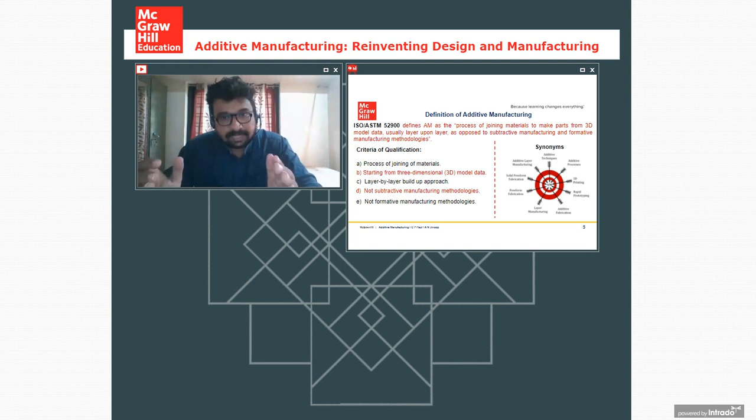If you come to the synonyms, there are different ways in which additive manufacturing has been known in the world, like 3D printing, rapid prototyping, additive fabrication, layer manufacturing. There are different ways in which people call additive manufacturing. And now ASTM and ISO standardized additive manufacturing as a single terminology for calling these processes.

And if we consider additive manufacturing, it is a natural process. And if you can consider it as a natural process, then it can be compared with plant growth. You can see how a plant grows from a seed to a plant, because it adds material and becomes a plant.

Similarly, if an infant becomes a man, it's also an additive process. And if you see construction work, it also happens in a layer by layer fashion, in which the bricks are arranged layer by layer to make a building.

So additive manufacturing existed for a long time, and recently it was taken to manufacturing because we got the technology. Initially we didn't have the technology to tame it, and we didn't have the technology to bring it to the manufacturing sector for industrial production. But now we have the technology to bring it to industries, and now we are using it for manufacturing of engineering components.

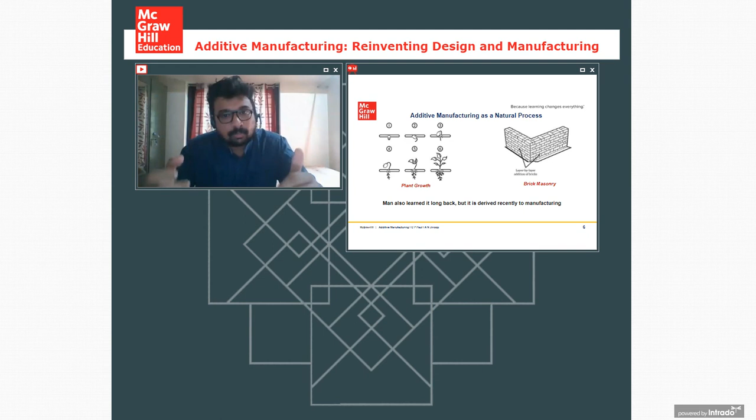So when we compare additive manufacturing with other manufacturing processes that are formative and subtractive, in terms of methodology, additive manufacturing means we are adding the material, while in subtractive we are removing the material, or in formative we are shaping the material. Coming to the lead time, it is less in additive and high in subtractive and formative. Coming to surface finish and dimensional accuracy, additive manufacturing is low to medium, subtractive is medium to high and formative is medium.

For material, additive manufacturing ideally doesn't have a material limitation. We should develop the process, we should develop the technology for processing any materials. But in subtractive and formative, we have material limitation. Subtractive is mainly limited by the hardness of the material, and formative is limited to metals and plastics. Size of the components in additive is mainly limited to the machine sizes, while in subtractive we can make large components. In formative also we can do it.

Complex geometry is a major advantage of additive manufacturing. We can make complex components of very high complexity as compared to other manufacturing techniques.

And coming to the last point, green technology: in additive manufacturing, since we add the material in a layer by layer fashion, there is no wastage of material. We can say that almost 60 to 90% of the material is used; you have a good amount of material usage, and minimal material wastage in additive manufacturing as compared to other processes where we are removing the material. So these are the ways in which additive manufacturing can be compared with other conventional processes for manufacturing parts.

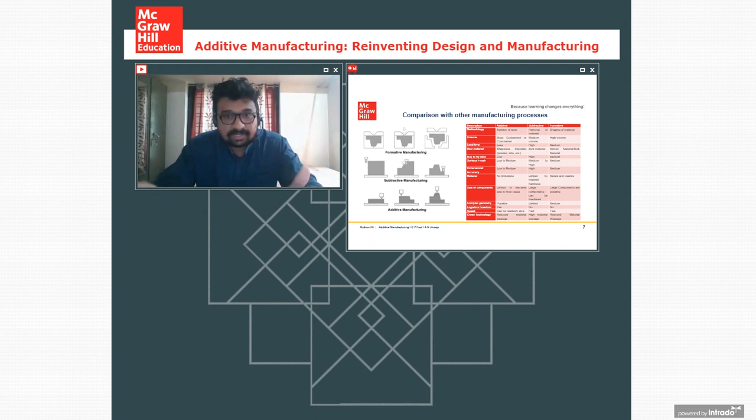So if you have 10 kg of material purchased, usually in subtractive manufacturing only 1 kg is converted to the actual product, so the buy to fly ratio is typically 10 for subtractive manufacturing. But in additive manufacturing, we can have a buy to fly ratio close to 2, and sometimes close to 1 also. Means there is no material wastage, we are only adding the material as per the requirement. And this is one of the reasons why additive manufacturing is seeing a lot of applications in the aerospace sector.

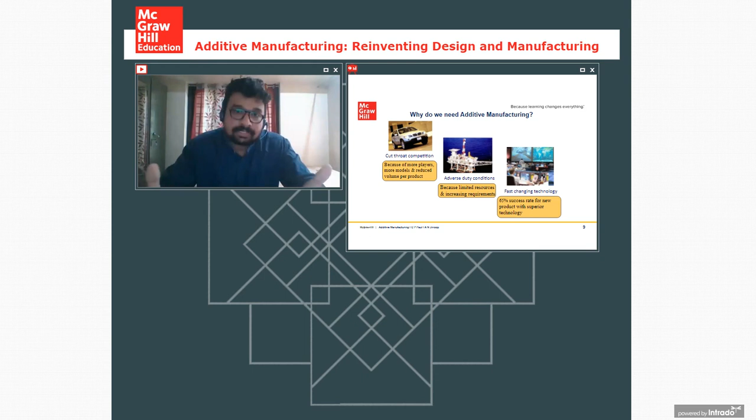And another thing is the fast changing technology, because there is a 65% success rate for new products with superior technology. So all these things bring us to the fact that additive manufacturing is required for improving the current manufacturing scenario, and for satisfying the customer requirements.

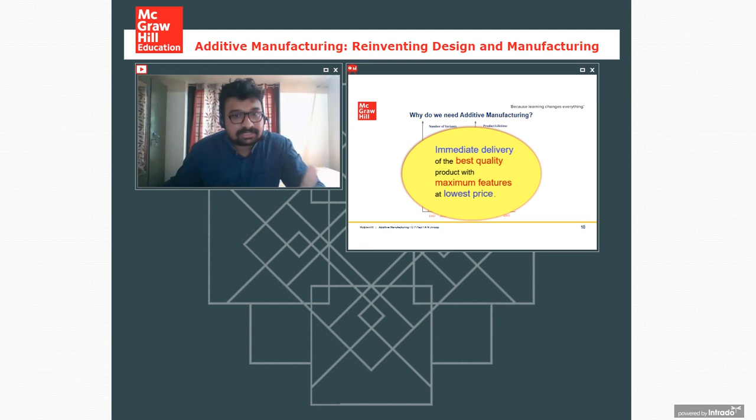And if you see, in an industry, the number of variants is increasing with time, and the product lifetime is reducing with time. At the same time, the product complexity is increasing, and the required delivery time is also reducing. So what we can conclude here is that the requirement is immediate delivery of the best quality product with maximum features at the lowest price. That's the major reason why additive manufacturing is required in the industrial manufacturing sector.

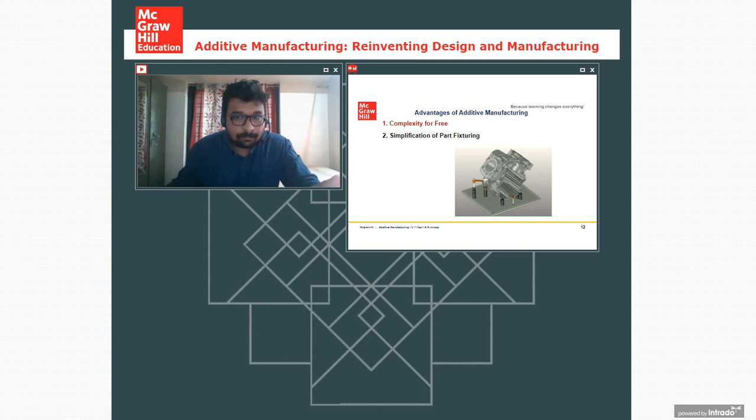So then we have mass customization. Additive manufacturing combines the two extremes of manufacturing, that is mass manufacturing as well as customized manufacturing. Mass manufacturing means you are producing components in bulk, in a large quantity, while customization means you are bringing the component as per the requirement of the customer. So additive manufacturing has that salient feature of combining all these.

One of the examples you can say is the fabrication of dental implants using additive manufacturing, in which we can have a single build plate. You can make a number of dental implants of different designs. So at the same time, you are doing mass manufacturing and you are doing customized manufacturing also.

Another is integrated components. Now it's an era of smart components where we can integrate sensors during the manufacturing onto the component, which can directly control the process. So integrated components, these are directly used by NASA for controlling the process. Like they integrate sensors using the sheet lamination additive manufacturing process to measure the temperature and pressure during the process, so that they can control the process online.

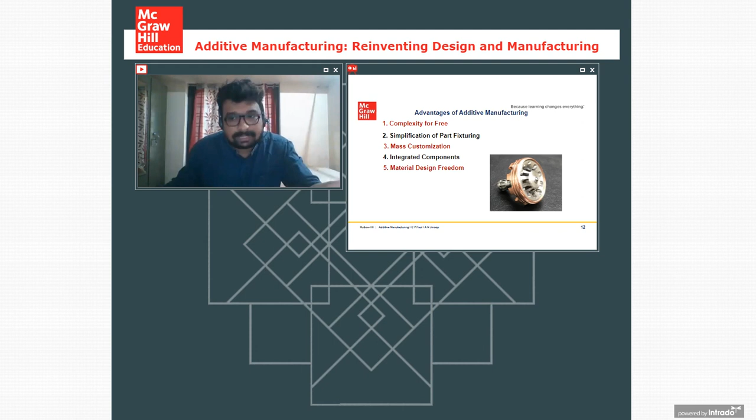Material design freedom. So additive manufacturing allows you to add the required material at required locations. Since we are doing layer by layer manufacturing, we can add the material at the location that we require. As we can see in this image, you can have stainless steel at one part and copper at another part. So you can have multi materials in a single component, and thus it gives you the freedom to go for high performance components by joining these dissimilar materials.

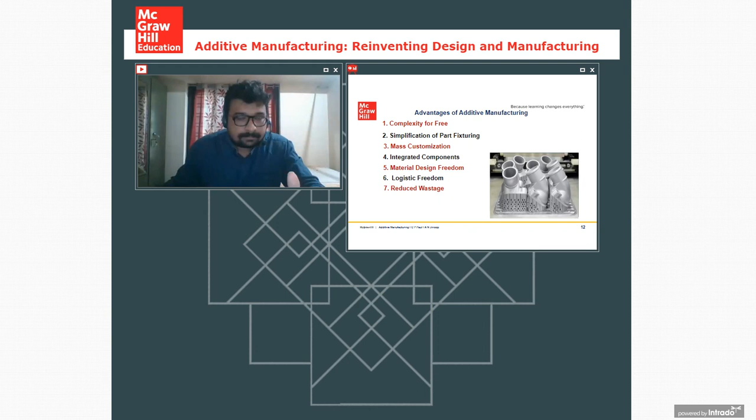So another advantage is logistics freedom, because additive manufacturing allows you to design a part in one part of the globe, and you can get it printed at the other part of the globe, and you can do the designing, you can do the analysis online. So it gives you logistics freedom also.

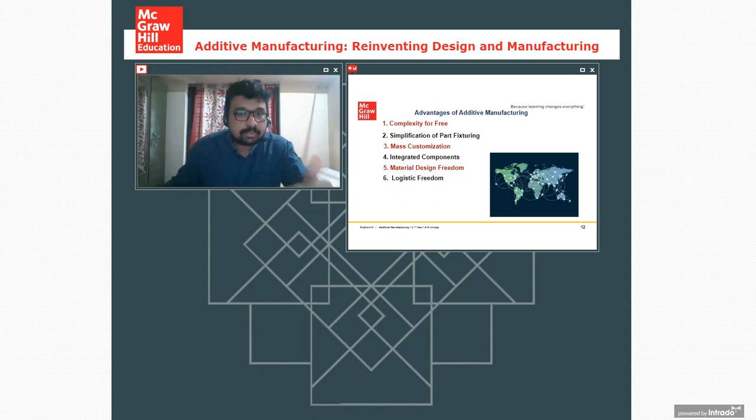And the final one is minimal material wastage. As I mentioned earlier, additive manufacturing builds a material in a layer by layer fashion. So there is no material wastage. We are only selectively adding the material as per the requirement, as per the design needs.

Coming to the limitations of the technology, the first thing is the high production cost, because the machines are really costly. Initially the machines were costly, I can say, but nowadays, as the patents are getting expired, the machines are getting relatively cheaper. But anyway, high production cost is one of the limitations of the technology.

Another part is the mechanical properties, because we have anisotropic mechanical properties in additive manufactured components, and the mechanical properties tend to be different from the conventionally built components, which are generally used as standards for any application. So this difference in mechanical properties from conventionally built parts poses a challenge for industries to use this technology.

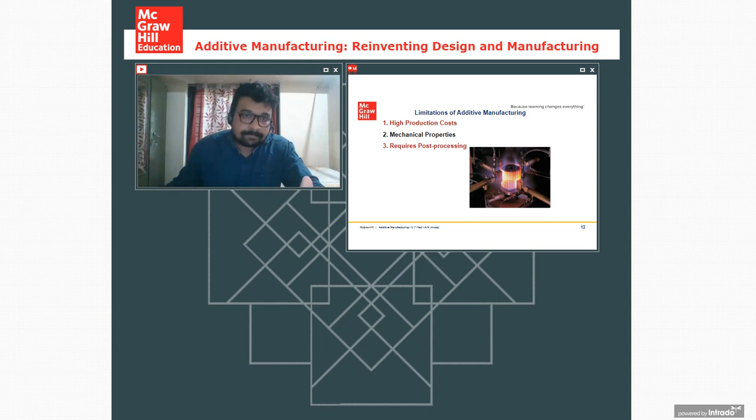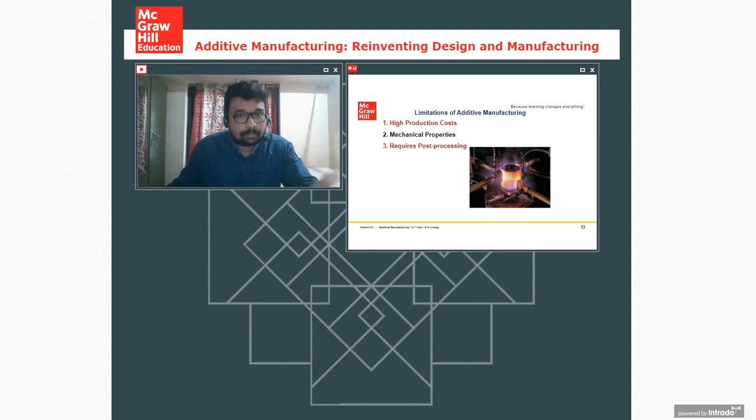Requires post-processing, means, as I mentioned earlier, in additive manufacturing the surface finish is low, and the dimensional accuracy is also low to medium. So we require post-processing treatments like machining or heat treatment to improve the properties. Like that, there are requirements of post-processing treatment after manufacturing to improve the quality of the built components.

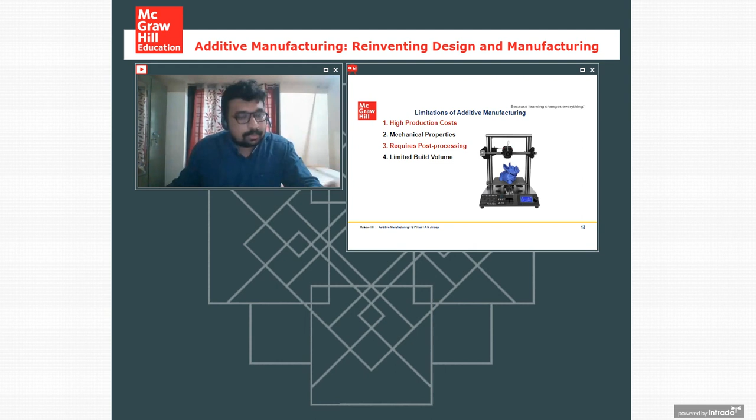Limited build volume, because the maximum size of the components that can be built in additive manufacturing is dependent on the machine build volume. So limited build volume is another limitation of the technology. Then the stair stepping effect.

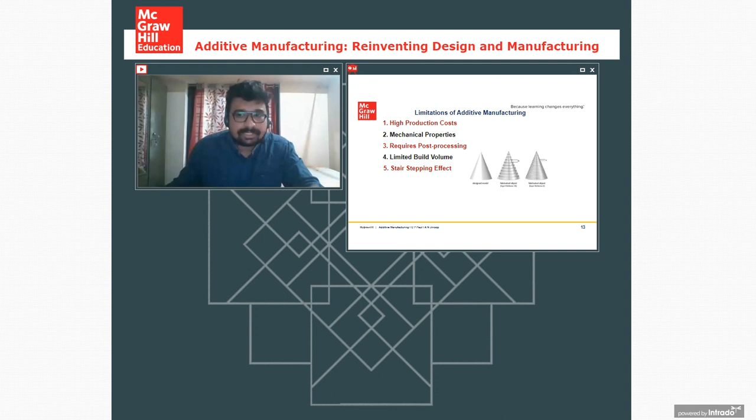You have components built in a layer by layer fashion. So you have a stair stepping effect, as we can see in the image. So this is also known as the Christmas tree effect in the industries.

So once the slices are generated for a particular component, take the example of a hollow cylinder. If you take the example of a hollow cylinder, we have a number of slices of circles. So we have a 3D model of a hollow cylinder, which is sliced into different layers that are circles. Then these layers are fed into the machine in the processing stage.

In the processing stage, we feed the machine settings, we feed the machine parameters depending on the additive manufacturing process, and the material is added in a layer by layer fashion. So we get the component by adding the material in the processing stage.

Finally, after the processing, we go to the post-processing stage. As I mentioned earlier, we need post-processing for additive manufactured components. It can be machining, heat treatment, support structure removal, or painting. So at the end, after processing, we go to the post-processing stage where we do all these treatments to tailor the properties of the component as per the requirement of the customer. Then we get the final product. So these are the different stages in which additive manufacturing takes place.

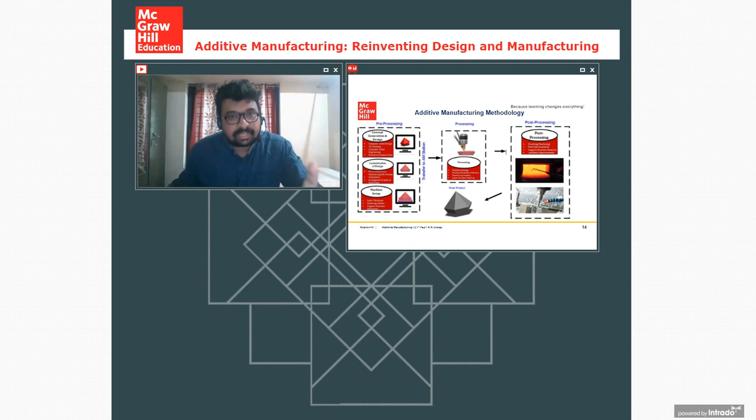Coming to the classification of additive manufacturing, as per ASTM, additive manufacturing is classified into 7 different processes: powder bed fusion, vat photopolymerization, material extrusion, material jetting, binder jetting, directed energy deposition, and sheet lamination. So these are the 7 technologies in which additive manufacturing is classified by ASTM.

As I mentioned earlier, if I take the example of a hollow cylinder, the laser selectively cures the region of a circle. Then the build plate moves down, the next layer of liquid is spread over the surface, and the laser selectively cures the region as per the requirement. Like that, the 3D component is built in a layer by layer fashion.

The major advantage of this technology is the higher accuracy. It can be used for micro manufacturing applications. It can have multi materials also, and the major limitations of the technology are the material limitations, and the cost is relatively higher compared to other polymer based technologies. It finds application in medical and tooling sectors, as well as in microfluidics.

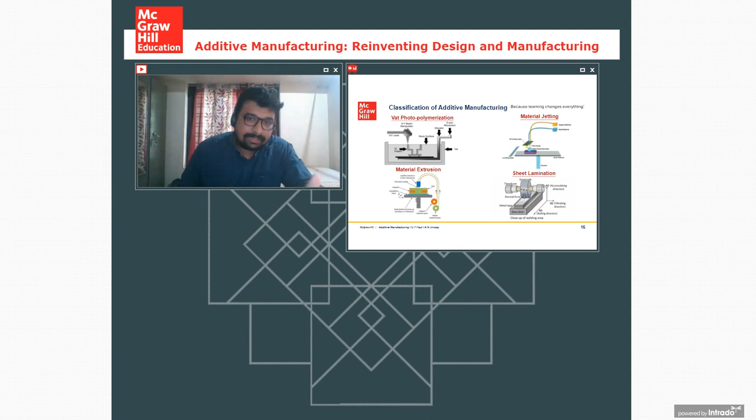Then the next process is the binder jetting process. In binder jetting, we have a powder layer that is spread on the surface, and a binder is used for joining this powder material and forming a component. So it is defined as a process in which a liquid bonding agent is selectively deposited to join the powder material. As I mentioned earlier, if we want to make a circular part, we spread the powder on the surface, and the binder selectively joins the powder particles in a circular fashion, so that we get a particular layer. Then the layer by layer buildup continues, and we get the final component.

The next process is the powder bed fusion. Powder bed fusion is a process in which focused thermal energy is used for selectively fusing regions of a powder bed. So we have a region of powder that is spread on the surface. Then the laser comes and selectively melts a region as per the requirements.

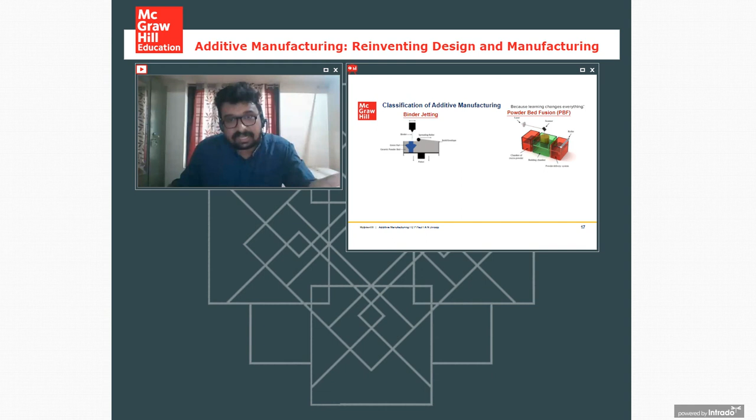So this is the way powder bed fusion works, and it's the most commonly used metal additive manufacturing process, mainly because of its ability to build highly complex engineering components, because it can build components in a layer by layer fashion. And since the powder layer is below the surface, it can build components with very high overhang angles also. So it can be used for building very complex components.

Another metal additive manufacturing process, the last one, is directed energy deposition, where we use a focused thermal energy for melting the material as they are being deposited. Means we use an energy source, which can be a laser or an electron beam or an arc. In powder bed fusion, I forgot to say one thing: we use laser and electron beam as energy source, while arc is not used as an energy source so far. While in directed energy deposition, we can use laser, electron beam, as well as arc as an energy source.

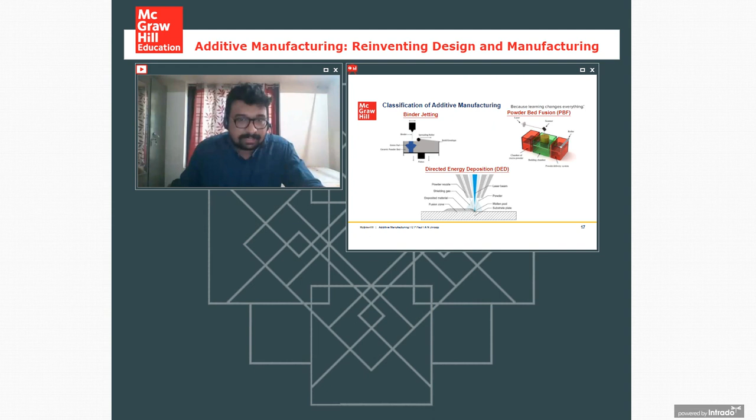And we use the energy source from here, and we feed the material, which can be wire or a powder, and it gets melted and deposited on top of the surface, and we get a deposition. It can be considered as a pen, and as we move the pen over the surface, we can create the part as per the required 3D geometry.

If you compare both the processes, relatively more complex components can be built in powder bed fusion, and part size is unlimited in DED. You can go for larger size components in directed energy deposition as compared to powder bed fusion. Coming to dimensional tolerance, it is in micron scale in powder bed fusion, while in DED it is normally in the millimeter scale. Layer thickness in powder bed fusion is in the micron scale, and in DED it is in the millimeter scale.

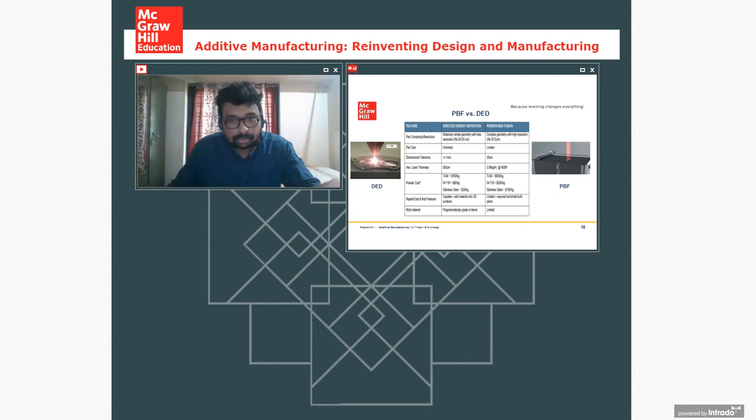And the cost of the powder used in powder bed fusion is relatively higher as compared to directed energy deposition. Directed energy deposition can be used for repairing and remanufacturing applications, while powder bed fusion has limited application in that. And coming to multi-material components, as I mentioned earlier, we can have multi-material in a single part, or we can join dissimilar materials also. This is more commonly used in directed energy deposition; there is literature that shows the application of powder bed fusion also, but the flexibility is relatively lower as compared to directed energy deposition.

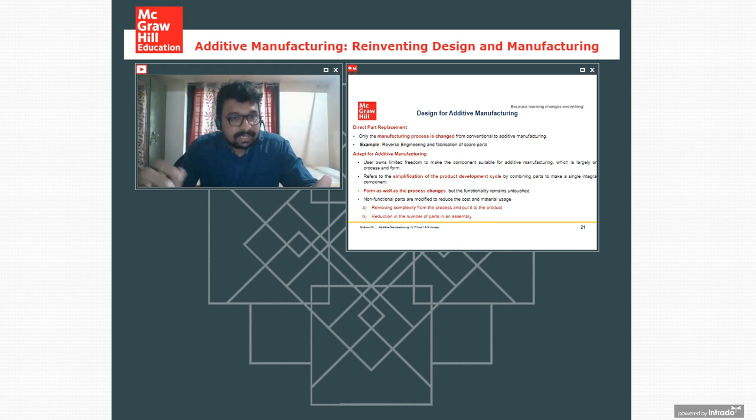Adapt for AM means we are changing the form as well as the process. Two examples I can cite: removing the complexity from the process, meaning if there are multiple processes that have to be used, like a combination of two manufacturing processes, we can change it and build it using only additive manufacturing. Reduction in number of parts means we are combining the parts and reducing the assembly by additive manufacturing.

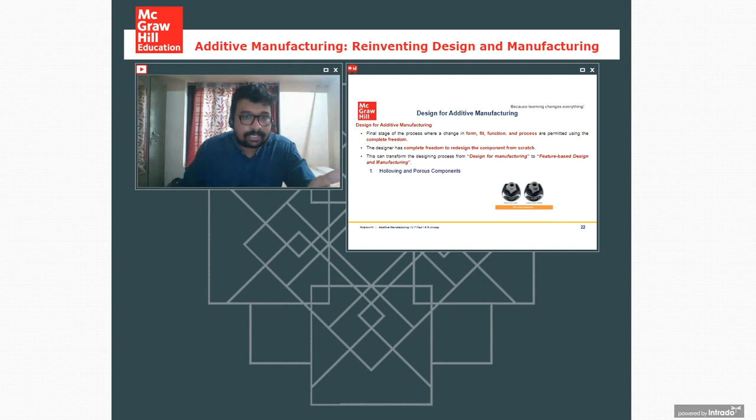Design for additive manufacturing is the final stage for an industry, where we change the form, fit, function, and process, and the designer has complete freedom to redesign the component from scratch. So this transformed design for manufacturing to feature-based design and manufacturing. So these are different ways we can do it. One is hollowing and porous components, where we can reduce the weight of the parts. Topology optimization also, it's an FEA technique where we reduce the weight of the component as per the loading requirements, as per the design requirements.

Then to increase heat transfer, we can have conformal cooling channels, we can have fins attached. So there are different ways of increasing the heat transfer. Mass customization, as I mentioned earlier, one of the examples is dental implants, where we can have a large number of components of different designs, then build them as a single unit. One common example is the GE fuel nozzle, where we could combine a lot of parts and reduce the number of parts by using additive manufacturing. One example where topology optimization is applied is a bracket, where the original design is optimized as per the loading condition, and we could achieve a weight reduction of around 18%.

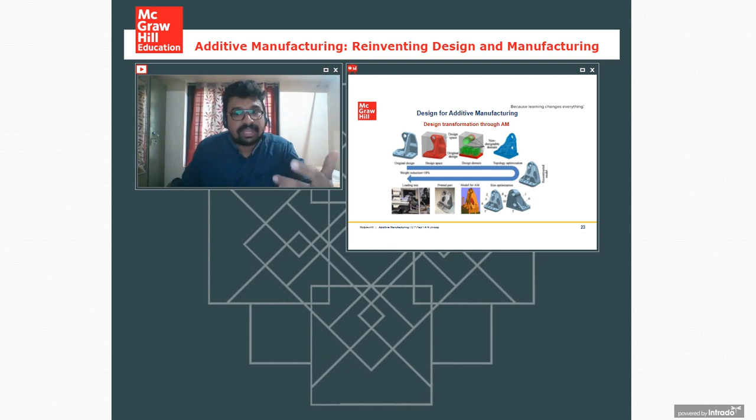strength. So this is one of the typical examples that is seen in the automotive sector, where we can reduce the weight of the component. At the same time, we can retain the strength of the component, which helps us to improve the fuel efficiency, or we can retain the fuel efficiency also.

So now there's a poll. I request all the participants to please attend this.

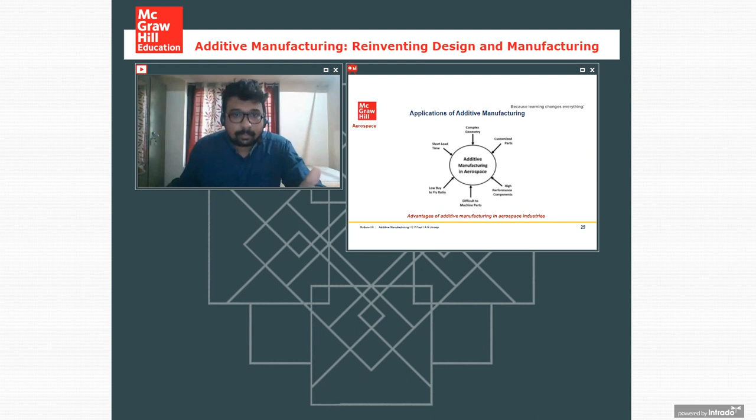So one of the applications of additive manufacturing is seen in the aerospace sector, where the major advantages are complex geometry, customized parts, and high performance components. Because in aerospace we have to work in extreme duty conditions, they require super alloys or many advanced materials, which are difficult to machine, and a low buy to fly ratio. These are the different requirements in the aerospace sector. So considering all these requirements, additive manufacturing is one of the leading technologies to be used in the

And we also got information from them that they are also going to build large size components using DED based additive manufacturing. So in the Indian sector, the Indian Space Research Organization is coming in a bigger way in the area of

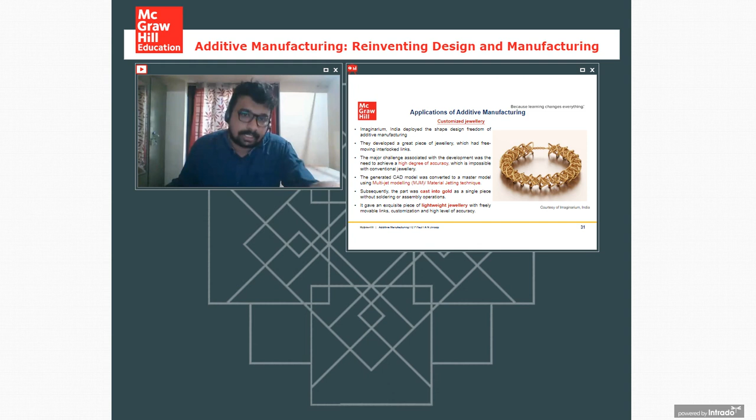So another application that we took is from Imaginarium India, one of the additive manufacturing companies in Mumbai. They use additive manufacturing technology for building customized jewelry. What they do is they use the material jetting technique to make molds, so that they can build it with high accuracy. And this mold is used for making the cast for the gold jewelry components. So this has a very lightweight and very complex design. So this is one of the applications of additive manufacturing in the jewelry sector.

There is one more case study coming from India: we have a 2-story building that is built in Chennai by L&T. That is another case study that is coming up, and there is a team working in IIT Guwahati in the area of 3D printing for construction applications. So that is the Indian scenario where people work on construction applications for additive manufacturing.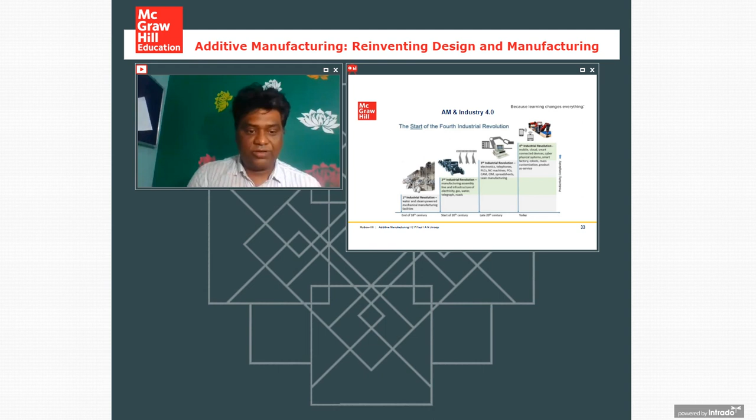And what I'm saying is, today the whole game plan is being seen as an integrated approach. Let it be the business strategies, let it be technology strategies, or let it be the digital world, or let it be the real world. So this is all what we are talking about in the fourth industrial revolution. See, there are nine...

So what happened is, this particular concept of industrial revolution was proposed at the Hanover Fair in 2011. And as I already told, the basic driver for this was the availability of the internet and the Internet of Things. So it started integrating the technical process with the business processes. Then digital mapping started coming in, visualization of the real world through the digital format, the merger of the physical and virtual world started, and people started seeing holistically in one way.

So its whole focus was on interconnectivity, automation, machine learning, and real-time data. So these are the basic things driving additive manufacturing. But if you see the whole Industry 4.0, there are 9 basic elements. You start from horizontal and vertical information flow. Because think of a big company like Tata Motors or Tata Group.

They have got many companies working with them, like Tata Motors, Telco, Tata Steel. So many verticals they are working on. And there is a very good amount of flow of information vertically; from the shop floor to the top management, the information goes. But when it comes to transmitting the information horizontally, it means whether Telco and Tata Steel are sharing some information. And this is the problem.

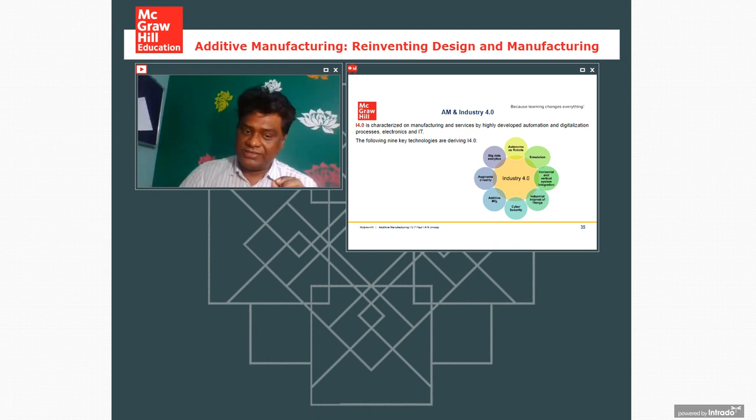So what I want to say is that there are 9 primary pillars on which the whole Industry 4.0 is based, and one among them is industrial additive manufacturing. Additive manufacturing is basically making things different. It is also interacting with the other pillars and making the whole process very attractive and very challenging.

Now, if you see how things will be, for example, you have an industry here, which is presenting the stuff we are trying to go with. An industry has so many pieces working together, the physical part. And what is expected in Industry 4.0 is that they have so many sensors inserted into it, information is sent, and we have a virtual system. The real sensors and virtual sensors, real systems and virtual systems are integrated together, all the information is working, and we are able to see it from there.

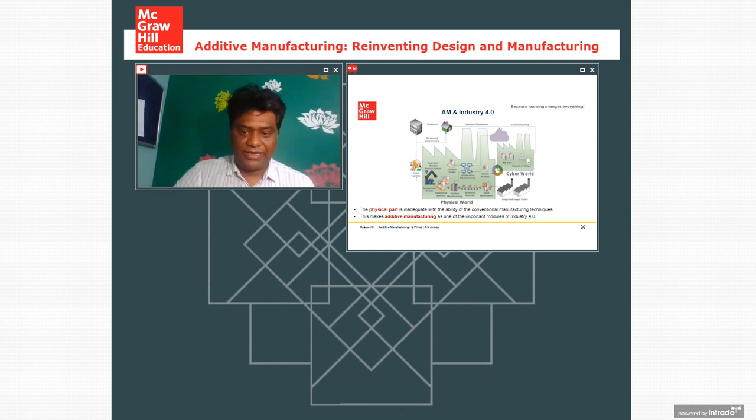I can give you a very good example. Suppose an aircraft flies from New York City to Delhi with maybe 230 passengers sitting in it. As far as Industry 4.0 is concerned, they want an integrated digital twin concept, in which all the information about the cabin, engine parts, everything is taken from the aircraft and sent to the satellite, and from the satellite the information is collected into one server. Then people can, in real time, get the digital model, see the situation, what is being done in the aircraft. That sort of thing is possible, therefore things are becoming very different.

So let me go to the poll. The poll is about concrete printing, which we studied a few minutes back. So you tell me, concrete printing follows which philosophy? Does it follow a material extrusion philosophy? Does it follow directed energy deposition philosophy? Does it follow material jetting philosophy, or none of these? So please vote. We are having a poll now.

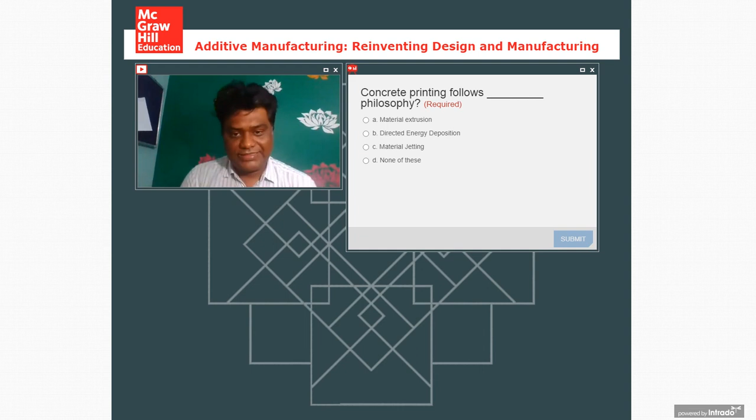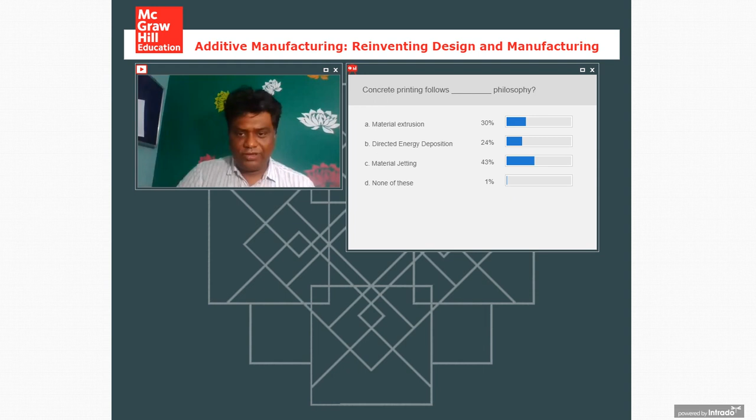Yeah. So I'll say the real answer is, the majority is not on the right side. It is material extrusion, because what are you doing? You have a mortar flow, and then you are taking the jet, pushing over it and depositing. So that sort of thing happens in this. Then we'll go for a very quick next poll. Yeah. This result is fantastic.

So let me come to the point where we'll be talking about what my lab is doing at RRCAT. So far we heard what is in the textbook. We heard what the world is doing. And it is important for us to know what we are doing at RRCAT in India. RRCAT is an institute under the Department of Atomic Energy, Government of India. And we are doing a lot of research in the area of additive manufacturing, especially laser additive manufacturing and metal additive manufacturing.

So let me tell you one thing. We have developed these two machines indigenously. One is called the laser directed energy deposition machine. Another is the laser powder bed fusion machine. The machine on the left side, laser directed energy deposition, costs somewhere about 5 to 7.5 crores if you buy from the commercial market. But we developed these machines and we are trying to push this machine into the Indian market in the price range of maybe 1.5 to 2 crores. So that much advantage we can have.

The other machine on the right hand side of the screen is the laser powder bed fusion machine. This machine typically costs from 3.5 crores to 5 crores in the commercial market. We developed these machines and we are going to launch this in the range of 70 lakhs to about 1.5 crores. So since these technologies are developed at RRCAT, very soon these machines will be in the market at almost 1/3 of the commercial price.

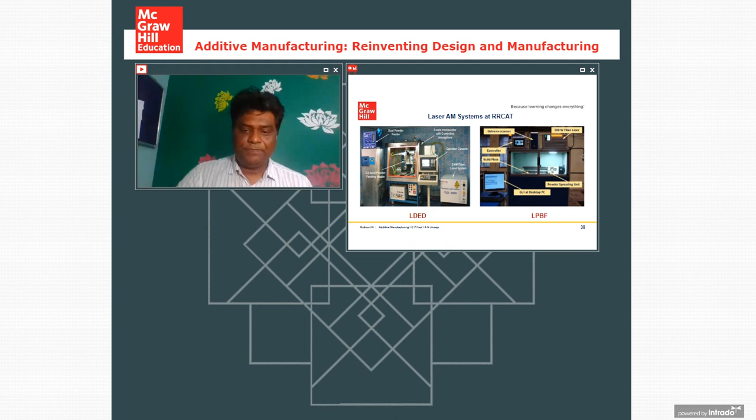Before pushing this to the commercial market, we also did a lot of research on various components. For example, one very typical component we developed for IGCAR using a laser additive manufacturing machine. This particular component is a very simple bush. These are special bushes made of Deloro 50 material. Deloro 50 is a nickel-based alloy, a very hard material. On the hardness scale, it comes out in the range of 800 to 850 VHN.

What people were doing earlier, they were making the substrate like this. After that, they were depositing Deloro 50 material using gas tungsten arc welding, and they used to machine inside and outside to get these bushes.

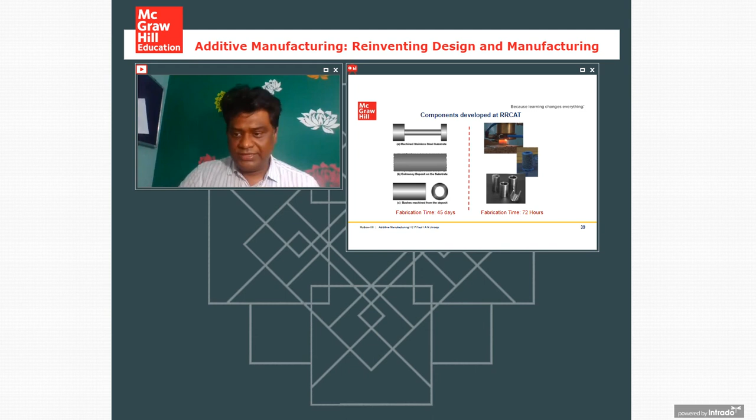And these bushes are not possible by using conventional manufacturing methods. So this is the thing that we did. And after that, we did the machining part of it. And we found that the fabrication time that used to take 45 days is reduced to 72 hours. That sort of magic could be done, and things can be done in a bigger and better way.

Another very good example is making low-cost tools. Suppose you are using a large diameter tool like 50 or 100 diameter; we use sintered carbide tips to provide cost effectiveness. But we are not doing this for low diameter tools because it's not possible to attach inserts to them. So that is a major limitation. But we thought, why don't we make a blank of low-cost material and deposit tungsten carbide at the edge of maybe 3mm or 5mm diameter tools and see the performance.

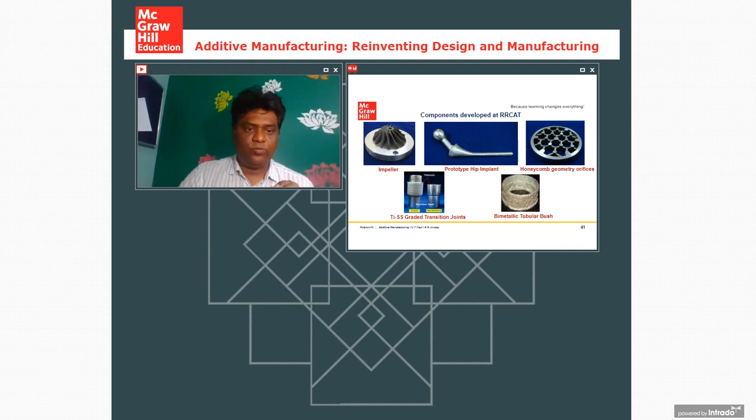Only a couple of slides are left, and you will love what India is doing in the area of metal additive manufacturing. We made compact heat exchangers, printed circuit heat exchangers. Think of a heat exchanger with channels 1.5 to 2 millimeters small and almost 200 millimeters in diameter. Can you think of making a 2 millimeter hole across, or having different channels? These things are required for the 4th generation nuclear reactors likely to come to the country.

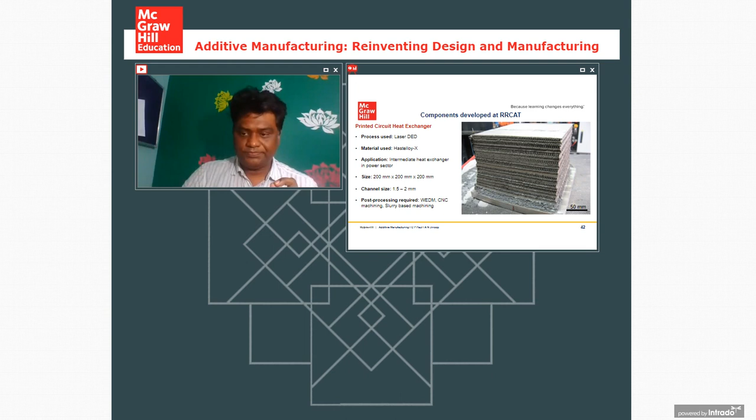Now, when we talk of so much greatness, we also discuss the limitations of the technology. One of the limitations is the high cost. Now patents are expiring. We have made some efforts to bring up the machines, but more innovation is required to take it to the common man in India.

We have to really start working on the inverse relation between speed and accuracy, find out how things can be done better. We also have to take up how quality assurance procedures can be done. These are the limitations today. For example, to make aero engine parts you need a lot of qualification. But these things will come slowly, and people are working on it.

And I'm saying there is a lot of unavailability of trained manpower to take up such assignments. So if people are learning and training, things can be brought to a better and better way. So these are the challenges we have today. We have a shortage of qualified materials. We have speed and productivity in additive manufacturing. Repeatability and quality assurance are the issues. Industry standards are not there. Security is an issue. A lot of things are there.

But what do we have to do as people who are doing the research or who want to join this mission to make this technology more popular? Something like we have a laptop at our home, you can have a 3D printer doing a lot of jobs. That sort of thing can be done.